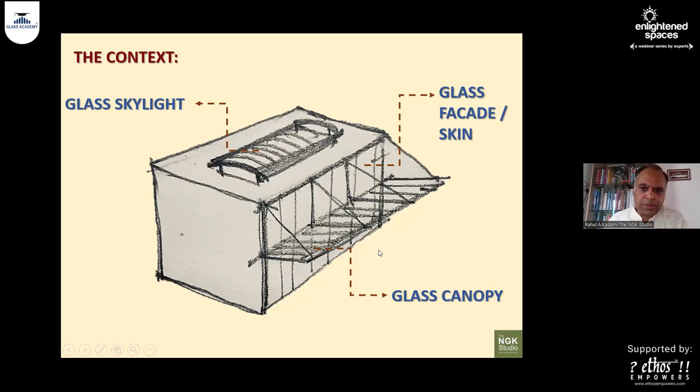In terms of the context, if you look at a building, the glass canopy is the one which kind of welcomes you inside. Then you have the building skin, which has got glass—we'll talk about some examples of that. And then, of course, to get light into inner areas, you have skylights. So these are the three types of glass surfaces a building usually has.

Before we go into some case studies, it's very important to understand the design forces one has to consider. This is a holistic way of looking at any project where glass is involved, and we follow this process. One is the creative aspect, where the visual or the wow feeling has to come in.

Because when you look at something you've done, the visual appeal is very important, so the creative aspect is directly linked to the visual aspect. The technical aspect is the next part, where the constructability of that glass solution with the structural engineer, facade consultants, and concerned contractors comes into play.

And then, of course, is the functional aspect, where the safety aspect comes in, because most of the buildings I'm going to show you are public buildings. So safety is paramount, whether it's an earthquake, a terrorist attack or bomb blast, or fire—safety plays a very important role.

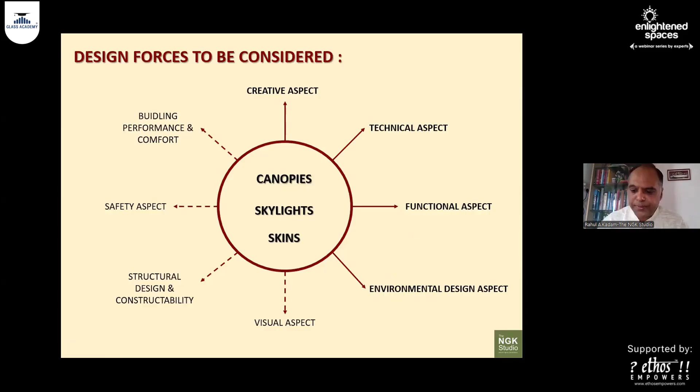Let's look at some case studies, starting with a glass canopy. This was a canopy we had designed—I was involved in it a few years back for a hotel. It is 15 meters long by 7.5 meters wide, so it has a proportion of x, 2x is to x, and it is 6 meters high.

It's 6 meters high because if there's a fire, the fire brigade should be able to go below. The whole idea is there are three such canopies at the entrance of the hotel to take in guests when there is heavy rain, so two cars can easily park and guests can come down. You can see that in the section here.

At the same time, when people have to be received back or chauffeur driven back, the cars come in and they are received. So here, obviously, when you're doing a 7.5 meter by 15 meter installation, wind speed acts very negatively.

It has an uplift pressure on the edge of the canopy that can completely make the canopy topple. So a series of tie rods have been used, which you can see here, and they transfer the load of the canopy to the neutral axis of the beam here.

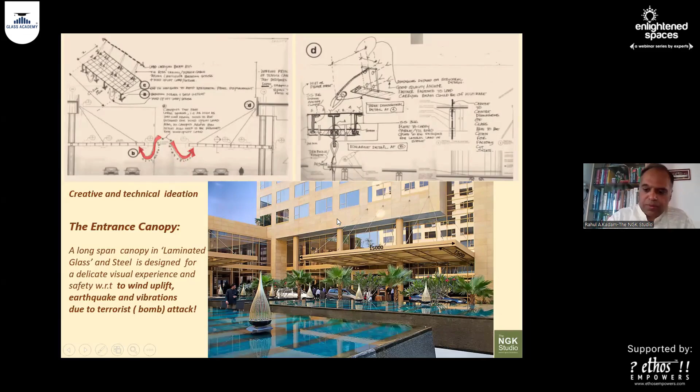And this is without anything, just to show you the entire canopy and how light it looks. So there's a lot of things in there which are making the canopy work, but it doesn't look like an eyesore because it's all well integrated.

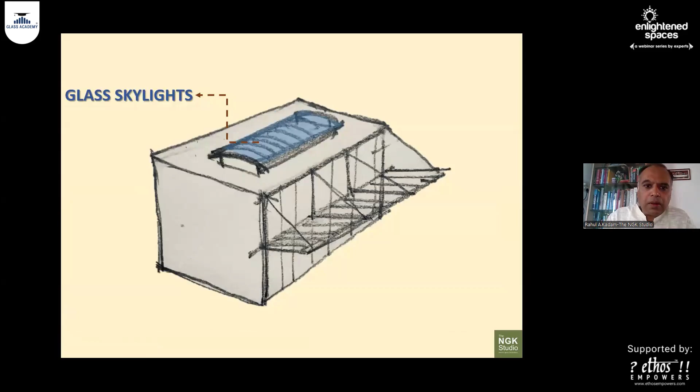Let's move to some skylights. So in the same hotel, there is a skylight done above the swimming pool. This swimming pool is just an exercise pool, about 5 meters by 15 meters, and above it we have this skylight.

The assembly to hold the glass is very similar to the canopy. The only difference is that there is a ridge line in the center and the water is drained off on either side. There's a small ridge draining the water to the side offsets, where there are gutters. Behind these columns, there are connections in the ceiling which further divide the water 50-50%, so it goes to the downtake pipes in a casing which you can't see.

Again, a lot of safety considerations, because this is on a middle floor of a building, and if the building were to vibrate in an earthquake, or if a bird was to drop, or if there was a terrorist attack, no glass should come onto the swimming pool water. So a lot of testing and considerations were done in terms of how the glass is sized and treated with laminated tempered glass.

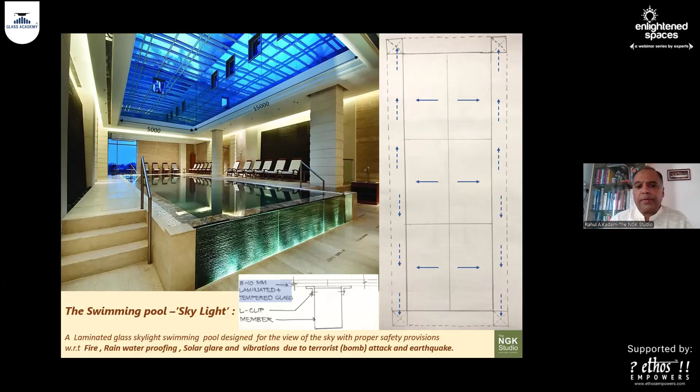In public buildings, there are authorities which certify glass also, because especially in five-star hotels like this, a third-party audit is done so that one is absolutely sure of the provisions and safety precautions. So this is just to show you the entire picture of that space and how the swimming pool is reflected into the skylight.

On similar lines, but slightly different, this is a skylight done for a cafeteria we designed. It's a very large cafeteria for 1,500 people, and right in the middle we realized this was the situation—it was quite dark and dingy. The average span was about 11 meters.

So we decided to cut the slab and then cut skylights on top. Each skylight is about 9.5 meters wide, but broken into three parts. We couldn't do away with these beams for structural tying for earthquake, because the building needs a tie since it's 11 meters wide.

And on top, there is a curved skylight with a grid system, and on top of that grid we have curved glass at tangents. But here, contrary to the previous example, we have...

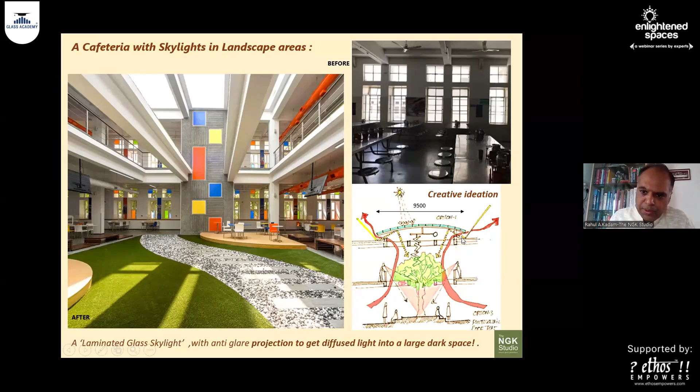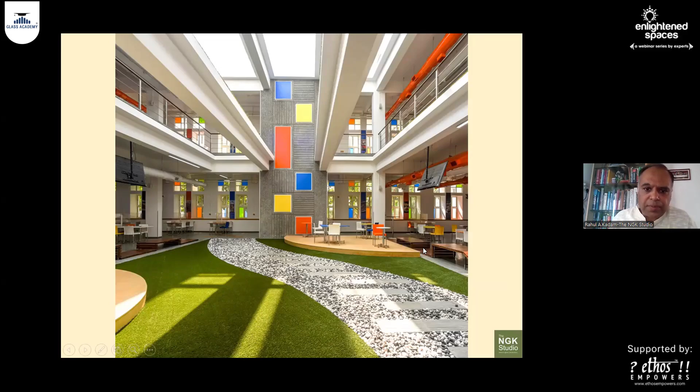So here you can actually see the kind of light. In this project, we wanted nice trees and actual grass in the cafeteria, but the client was a bit skeptical about maintenance, so we got artificial turf and pebbles instead. It still gives a beautiful feel of the light filling up this space and making it very lively.

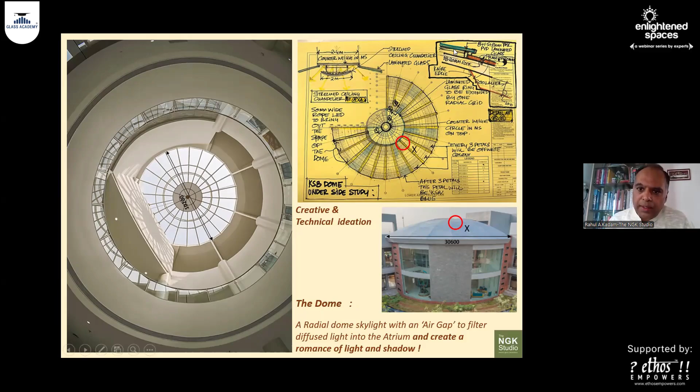There is a fascia here and a slight air gap, so that hot air escapes out from there, and you get good circulation of cold air below. So environmentally that is also being looked at, and then you've got this kind of beautiful aura of light coming down, as you can see here.

The changeover from afternoon to evening is signified by this nice pattern of the oculus being reflected. This is, I think, around 12 o'clock—it gives a beautiful pattern of the oculus on this plane surface.

This is another example of a skylight of a large workspace we have done.

Unfortunately, this building could not be oriented the ideal way because of the way the site was. So the office, this is a plant office, starts in the morning.

So we decided to get in west light, because the office only works from 8 to 4 or 8 to 5, and the west sun would be in only at 3:30. But in the morning, the east light is the best light. So we got the east light.

So this is the east light coming into the office. And the central part of the office is literally flooded with landscape, so it becomes like a collaborative space where people could come out. And everybody here gets diffused light in the morning.

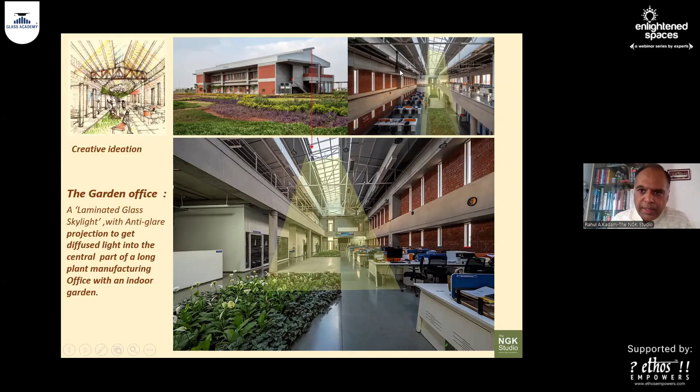And the east light was taken perpendicular to the working plane, so that you don't get glare on the screen. And it's a very nice place to work in. The entire space is further treated with cross ventilation and evaporative cooling with HVLS fans.

And here you can see the detail. We have a 3-meter wide skylight, which is almost 45 meters long. And this 3 meters is further divided into 2 parts of 1.5 meters. So it's the same technology of laminated glass supported by these ribs.

And to remove hot air, as you can see, the cold air is settled at a lower level, even by ventilation and cross ventilation. And all the hot air is removed from these louvers, which have a bird screen so that birds cannot fly in.

In a very passive way, we've been able to maintain very good comfort conditions, and we've reduced huge amount of air conditioning load in this space, almost 70% plus.

So this is the space with the landscape, the workstations, the east light and the west light in the morning. So up to 3:30, it's very comfortable.

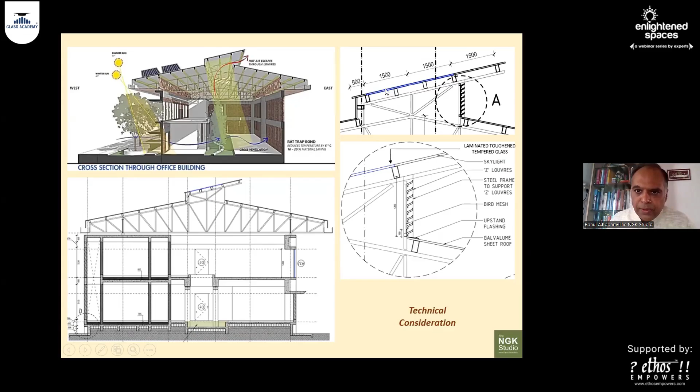And then to avoid direct glare, on top of the skylight, just to take you back, we have anti-glare film here. So it actually reduces solar radiation by almost 80%. Because on the west side, between 4 to 6 it can be hot, so we had to do that. But otherwise, I would say 80% of their work day they get good filtered light.

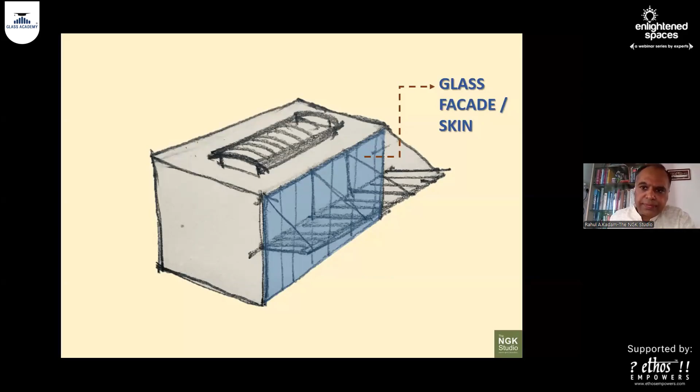We move to the last category, that is the glass skin or the glass facade. So here we will show you a variety of skins, starting with structural glazing and why it is called structural glazing. This is a sports bar we have designed in one of our sports and wellness centers.

And here, unfortunately, the worst side climatically, south-west, had to face the water and the view. And then you come into the sports bar after playing badminton or working out, and you have a drink. That was the concept. But the best view is on either side of the water.

So there is heavy wind load that acts on the walls of the sports bar, which had to be transparent. This is the sketch that was done visualizing. We were very keen to do this in bamboo, but in spite of our best efforts, we failed. Client wanted something robust, so we had to go with a combination of steel, aluminum, and glass.

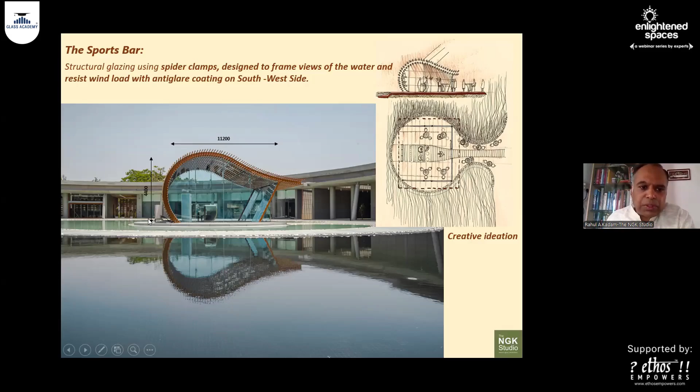So the sports bar is around 4.4 meters by 11.2 meters. And in terms of the construction, there's heavy wind load. So beyond when glass, particularly structural glass, goes up by 2 meters height, it is subject to heavy wind load.

So you use structural glazing, toughened tempered glass, which is capable of taking heavy wind loads because wind is directly acting on this.

But then there is a sequence in which the glass is designed. So the first thing is that the glass is connected by, as you can see in detail A, spider clamps. These spider clamps actually hold the glass together.

And at the top part, where the wind loads are higher, there is glass fin, so this makes sure that the thrust on the glass is taken care of. And then the spider clamps and the fins are further connected to this structural ring beam. There's a ring beam below here also, which you don't see because it is below this pedestal. And then the load is transferred to the foundations.

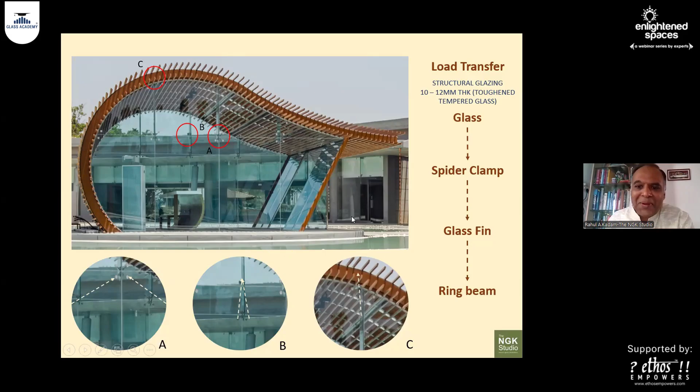In this case, it was very complicated because there's water and then there is a pedestal and then there is foundation inside this. So we had to do a waterproof kind of foundation. A lot of things which look beautiful have a lot of complexity involved. So for this to look this beautiful, a lot of anti-rust or anti-corrosive foundation detail is done inside this pedestal.

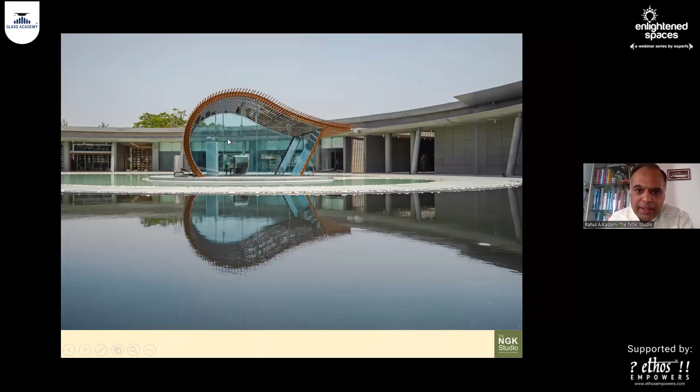And then, of course, very high wind speed hits on this surface. Now, this is a slightly typical example where we've designed the public areas and the office space of this building, including the facade.

The idea was that wherever you wait in the atrium, by the way, the dome that I showed you is of the same building, so this is just next to the dome, you are able to frame the view of the landscape.

As you can see in this diagram, the first beam is at 3.9 meters height, and then this span is about 6 meters, but it is in a reverse curve, so that is further building thrust like a bow or to some extent on the glass.

This size of glass was becoming very expensive and not viable, so we decided to divide 3.9 meters into two parts of 1.95 each, and then each part was around 1.2 meters, so you got the proportion of glass in the golden ratio of 1.6 to 1.618.

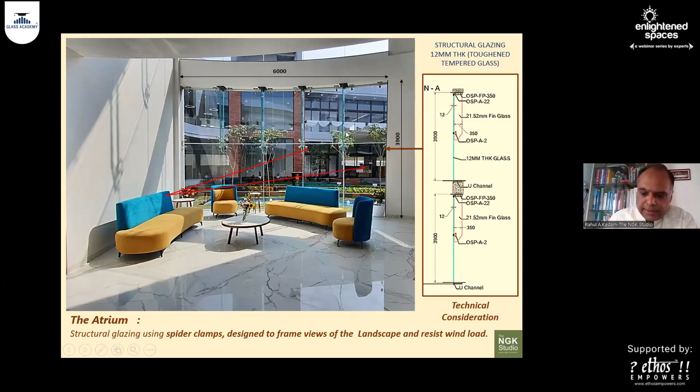So it looks very beautiful. Otherwise, this proportion would not have looked nice. And then this is the proof of the pudding.

As you see, very similar to the first case, the glass is connected with a spider clamp. This is the top fin, and then the top fin further gets connected to a plate which transfers the load to the beam. There is a lower connector also, which you can't see because it's behind the furniture, but there is a set of a plate and clamps here which transfer it to the ring beam.

So all these things are done to capture the view because this is an air-conditioned space, but you have to be careful that safety-wise, all these precautions are in place.

Again, I might sound like a broken record, but if there is an earthquake, the facade will move in all axes. The glass is designed up to a certain tolerance, but till people escape out of the building, the glass should hold.

This is the conventional glazing. You see this very commonly on glass facades, curtain glazing. We've always used this on the north facade because it is glare free, and in this building also it's been done on the north facade.

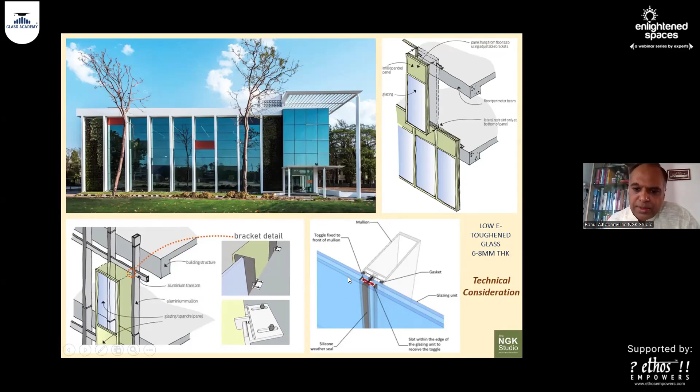This system can also be used if you use double glaze systems. In that case, the transom comes and then there's a clip and then the double glazing. This is the inner glass and the outer glass. The inner glass is always thinner, the outer glass is always thicker. I'll come to this in an actual solution we've done in the next few slides.

So this is where you see the building. All this is north facade.

You can see the system here. This is the solution where we use double glazed windows, 8 feet by 9 feet, that is 2.4 meters by 2.75 meters. The whole idea is to frame the landscape because we had beautiful mangroves outside, and this is a boardroom we've designed, so we wanted everybody to look at it. This is one piece of glass in 2.4 by 2.75 meters.

The cross section is somewhat like this. We have 10mm thick glass outside, which is coated for anti-glare and heat, because this building did not have long chhajjas. It was an old building which we have repurposed. Then there is an air cavity of about 50mm with argon gas so that the cavity becomes hermetically sealed. Then there is an inner glass, which is this glass you are seeing from inside, about 6 to 8mm. This entire section is made in a factory and comes as a ready-made section that is brought and installed. A lot of measurements at site have to be checked, not only physically but with laser, and then the whole installation is brought in, because if this goes wrong, the entire window has to be rejected.

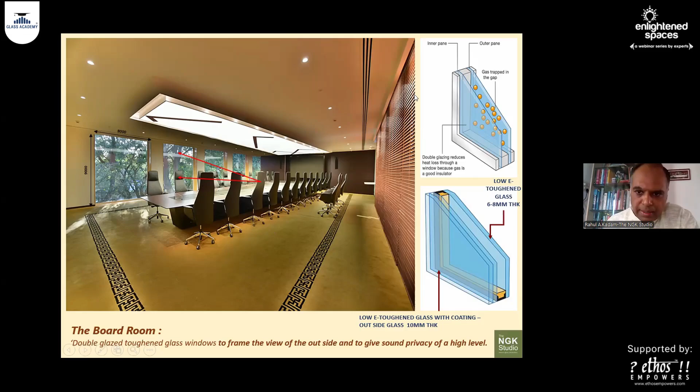This cuts down heat as well as sound. In the case of this boardroom, it was next to the mangrove and the old Bombay-Pune highway, so we had to achieve high decibel privacy inside, which we were able to do with these windows, but at the same time frame a beautiful view. Inside, there are pelmets which close these windows when you don't want the sun, like when you're doing a presentation—these kind of blinds are there inside. This is just to show you the entire boardroom where you can frame the view and get beautiful natural light. Of course, we couldn't do anything here because this is where the column is—the column actually juts out that way, so we couldn't break it, so column to column it has been taken.

We are also involved in projects where we want our facades to breathe like a living organism, and here is an example. This is a proposed high-rise where unfortunately the east-west axis was the longest axis of the building, and we had to safeguard it. So what we've done is the facade of the building is inside, and then we have a veranda space which is louvered with plants. This can be between 1.2 to 1.8 meters based on the FSI relaxations you get. This plants with running water kind of keeps the whole area very cool, and then the glass facade becomes a boundary, with the office inside.

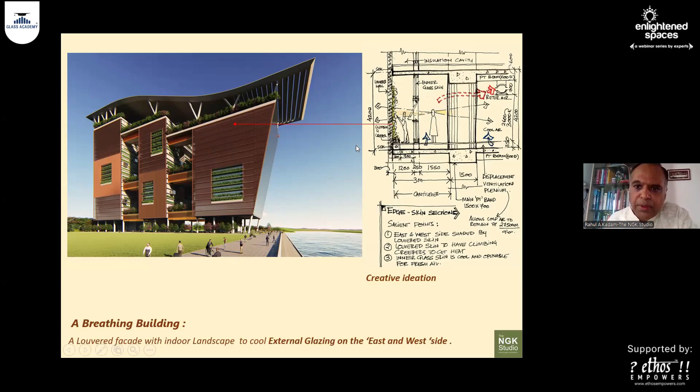Here we've actually used displacement ventilation, which throws cold air from down and removes all the hot air from up top. Because of this, we are able to save almost 12 to 15% of latent heat that would come from the facade. That's why we're calling it a breathing building, because it actually makes the building breathe.

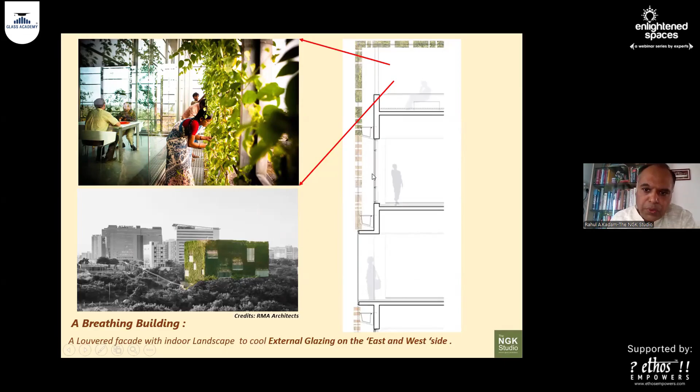A similar kind of building has been designed by RMA Architects, Rahul Mehrotra and his team, in Hyderabad. I thought I should show you this case study where you have a service space and a veranda space where these green plants grow, and they also go outside the building. The entire building is fed with a mist of drip irrigation so that the plants grow, and then the inner facade is protected and cool. This also reduces a lot of air conditioning load because the inner facade is not exposed to direct sunlight.

This is just to show you the building, how it is a breathing building. Here all the public shade areas were non-air conditioned, and the lower part of the building became a public realm, and the facade also echoes the aspect of sustainability by having the louvered facade I showed you, with a terrace which grows its own food, and a solar roof which gives the building its power requirement.

With this, I end our sharing. I think our effort has always been to be very holistic, where the functional, technical, safety, environmental, and aesthetical requirements are looked at very carefully, so that a memorable solution in glass is brought about. Because glass today becomes the visual identity of the building—it can make or break a building. I think it's our responsibility as architects to bring all these design forces together and do a good job about it. So thank you, this is what I wanted to share.